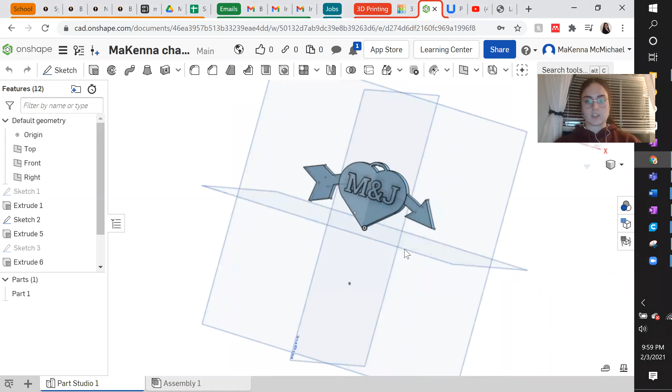This is the charm that I created, and I'm going to show you the entire process of developing the sketches, the extrusions, and the design itself.

First, what you're going to want to do is go into Onshape. If you don't already have an account, you can use one through your Rowan email for free, or your school email if you don't go to Rowan.

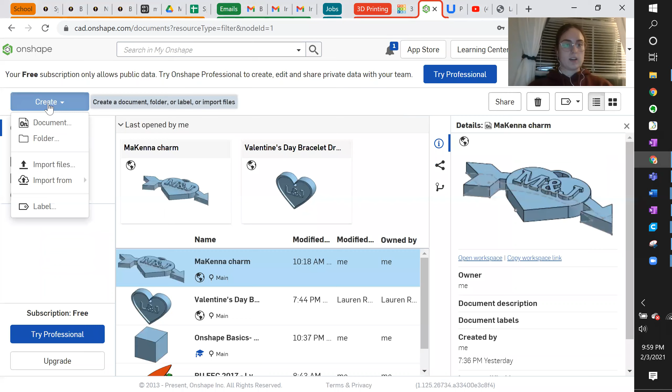What you're going to want to do is make a new document. For this one, I'll just title it 'tutorial charm.' You can name it whatever you want, and then create it.

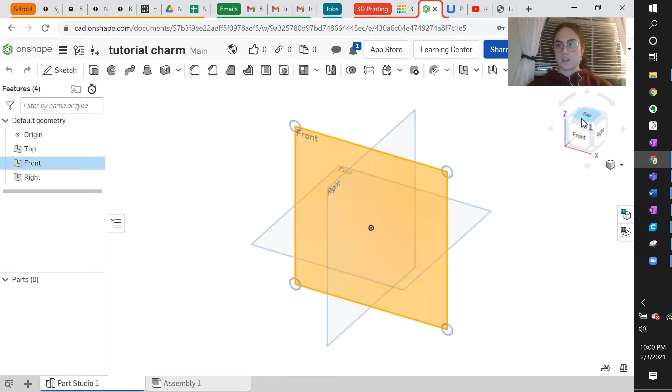This is going to bring you to the Onshape studio space. I do everything in the front or top window, and basically what I'm going to start doing is making my basic heart.

I like to use the mirror tool to make sure it's even. So you're going to create a sketch, make sure you pick your plane, and then first use the line tool.

You're going to start in the center and make your line go up. It can be any length or height—if you want it to be longer or taller, make sure you figure that out. Then you're going to want to escape that line.

You're going to do another line from the bottom up, and picture this as the bottom half of your heart. You're going to want to see visually where the arch is going to go to create the other half of the heart, so I'm going to go about right here.

I'm going to escape this line and create my 3-point arc. I'll start from the line I made, go to the other line I made earlier, and go out to about there for my heart.

I'm going to escape the arc and take the mirror tool. You're going to want to mirror that line over the one we originally made. Now it's telling you to select the entities you want to mirror—take the bottom and the top, and now you have your heart.

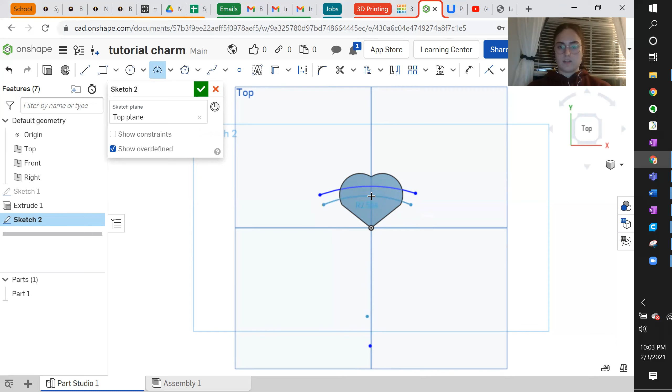And as you can see, the distance between this side and this side is different. So I'm going to actually highlight over that first arch I made and do it over again. You can do this as many times as you want until you are comfortable with the arch distances in the arch you've created.

And then just go back in. Perfect. Again, make sure you're always escaping your arch or your line after you're done with that section.

So next you're going to want to actually make the arrow. I've done all of my arrows with the line, and I'm going to start with the tail of the arrow. I just start by putting a point and pulling it out. Again, you're going to really want to over exaggerate the end of the arrow and the arrowhead to make sure that the 3D printer can actually pick it up when it's printing.

So I'm just going to put that one about there, about there. I'm going to escape the line so I can start from the other side. And go out to about there, go down, and back up. Now I'm seeing that this isn't exactly even, so you can actually move the end and edit the distance and the way that it lays.

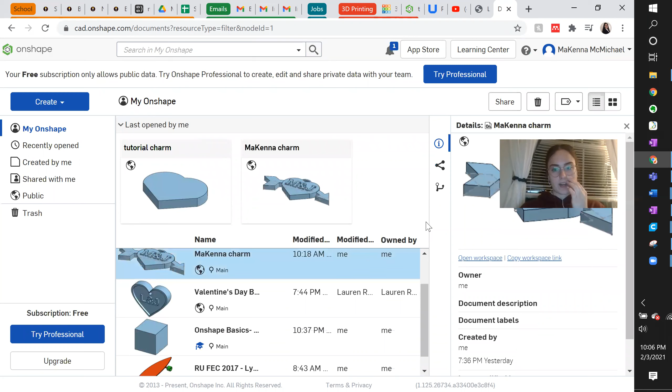Come along with me. So here's the charm that I actually did already. On the top, yeah, so this one's not as big as the one that I am currently doing, but it's about the same size.

Whatever shape you want your tail to be, perfectly fine. Like I said, I think this one is also fine as well. If I wanted to move it down, I also could. And then just moving that around. Boom, looks good to me.

I'm going to do the head of the arrow. And this, again, you're going to want to make way bigger than you think it needs to be, because otherwise it's just really not going to work. I like to try and line it up with that portion, but it doesn't always work.

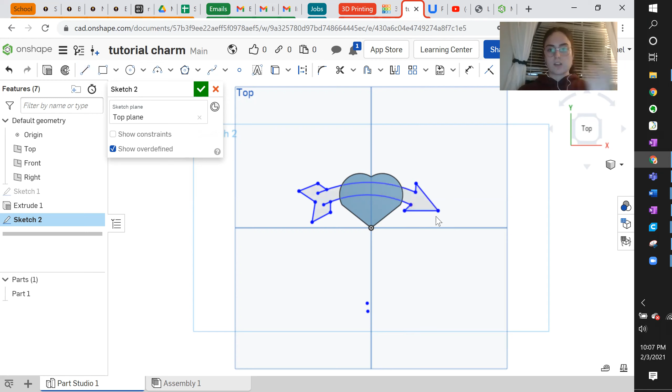Line, a little over, bring it back in, and then line, bring it over, and bring it back in. So this is going to be my arrow. Honestly, I think that's pretty good. I'm not going to lie.

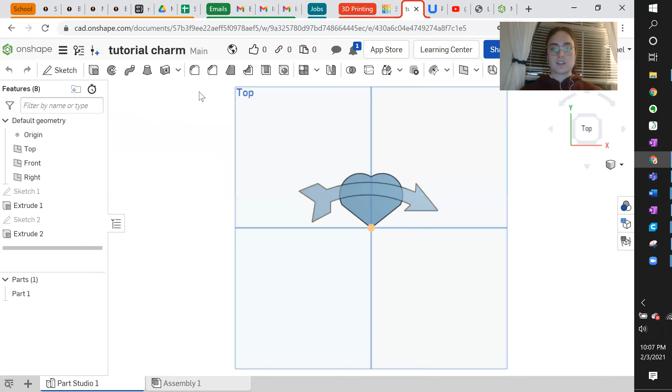Looks good to me. So again, confirm your sketch. I'm going to go around and extrude it. Make sure you're doing everything in solid for now. I'm not sure if at any point you'll need anything other than solid. I will let you know. But now you have the arrow through your heart charm.

Beautiful, chef's kiss. Now, another sketch. Make sure you pick your plane. This is the one where I'm going to actually make the loop that you see here at the top. This is going to be where you can connect it to your bracelet, your necklace, whatever you want, depending on if you have your own printer, if you want to make it bigger, make it a keychain, whatever you want.

But this is where we're going to make that. So we're going to use arcs to do this. We're going to pick about there, and we're going to go to about there. And we're going to just pull it out just enough so that's still going to be able to do that. And what we're going to do is use our dear friend, the mirror, again. We're going to go over this line with this entity. Boom, the other side's there.

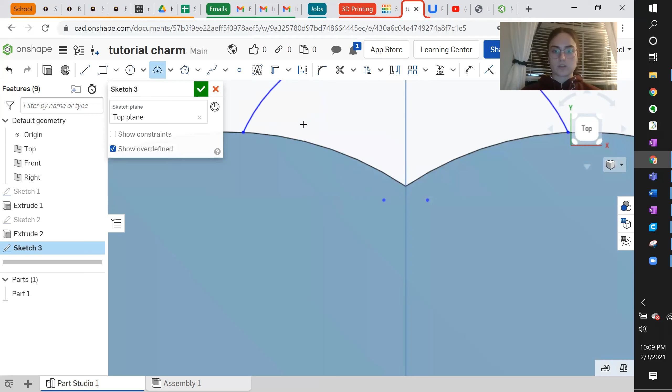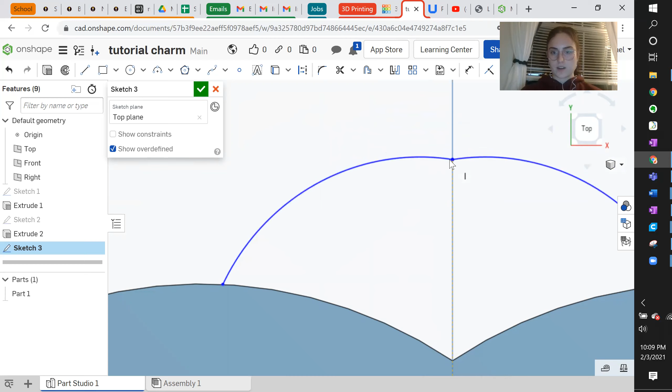Okay, so now we're going to go into another arc. Maybe have to get a little closer. Escape it. I'm just trying to get in there so I can actually see what I'm looking at and telling you guys to do. See how this one's a little, it's like not straight across. I'm gonna try and fix that. Delete that.

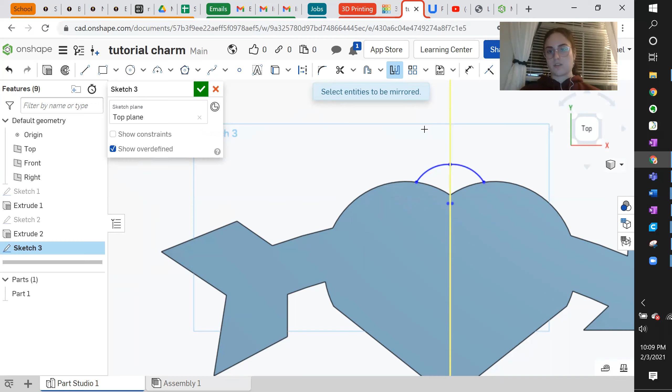We're going to start that arc over again. If you're not a perfectionist like me, just honestly leave it like that or something like that. Make sure it's basically straight across, but don't break your heart trying to make it perfect.

All right, going to zoom in. Make sure it's a little thick. Just the same exact thing.

Boom and boom. Don't forget to escape your arc, most important piece of information honestly. Mirror it. Boom. Now you have... oh, just kidding, I messed this up a couple times.

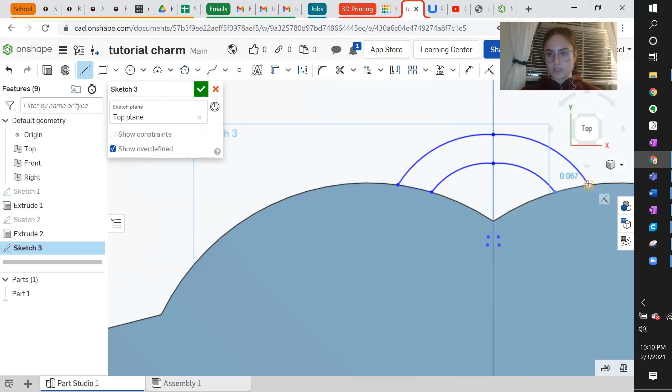Don't forget this. So now what you want to do is connect the two ends of the arc with lines so that you can make this addition, this piece that's going to hold onto things with, an actual solid so you can make it into an extrusion. Very important information. Again, 5 millimeters, extrude it, and now you have the basis of the design.

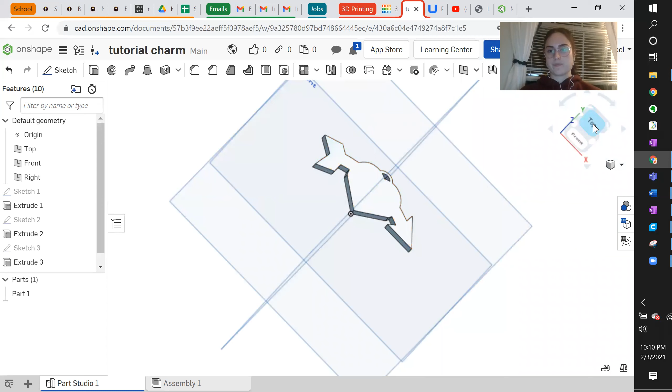Here's where it gets fancy. You can do what you want, you can print it like this, or we're going to put some text on it. So you can put your initials, you and your boo's initials, you and your dog's initials, a date, whatever your heart desires.

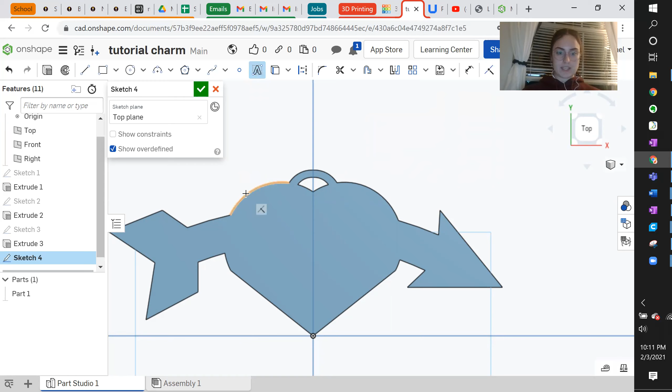And you're going to use the sketch again, another sketch. Don't forget to pick your plane. See this thing right here? It says text, that's what we're going to use. We're going to make sure we connect it to corners because apparently that's the only way you can resize or shape things. You're probably going to watch me struggle, I'm not even going to lie.

So I'm going to put an M and a J for me and my human. I went through all of these fonts and I really like Roboto Slab, but go through whatever font you want and pick whichever one you like. And you can bold it because you are bold.

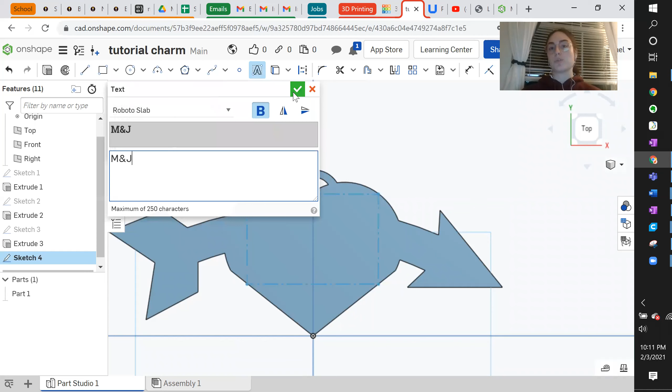Now we're going to move it. Apparently I remember this one being the one to move it from, I don't know why, but that's the one it likes to be moved from. I'm going to put it right there. Boom. Now click OK and go to sketch 4.

Extrude it. You're going to want to extrude it a little bit more than you extruded the rest of everything. Everything else I did about a 5, so I'm going to try a 5.5 millimeter and see what that looks like.

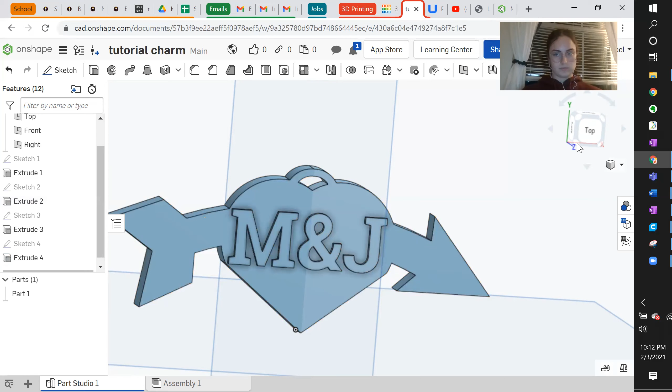That's pretty good. I'm going to see what a 6 millimeter extrusion would look like, because you want to make sure it's going to be easy for your printer to actually print. Going through it, yeah, I think I'm going to leave it at 6. So I'm doing about 1 millimeter longer than the rest of the extrusions.

So now you have your beautiful charm for you and your significant other. You can make a bracelet, you can have 3D Printing Club make it into a bracelet, you can put it on a little necklace. I'm printing mine larger and forcing my significant other to put it on a keychain on his lanyard.

To each their own. Don't forget, when you're trying to put this in Cura, if you have your own printer, just export it as an STL file.